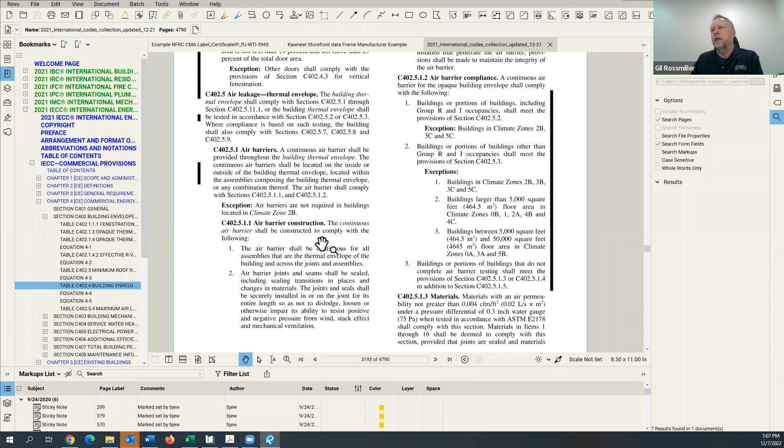Okay. And the only thing that's really different is you've got the ability now to, I'm going to go ahead and share my screen real quick, is the ability to have, rather than dealing with the volume of the very small apartment buildings, which is generally where this will end up showing up, right? I went into the commercial piece here, but the same thing would be for most of the time where we get the confusion is

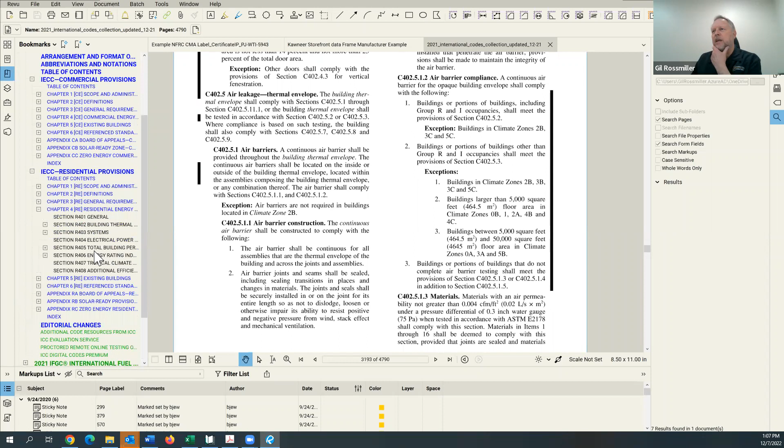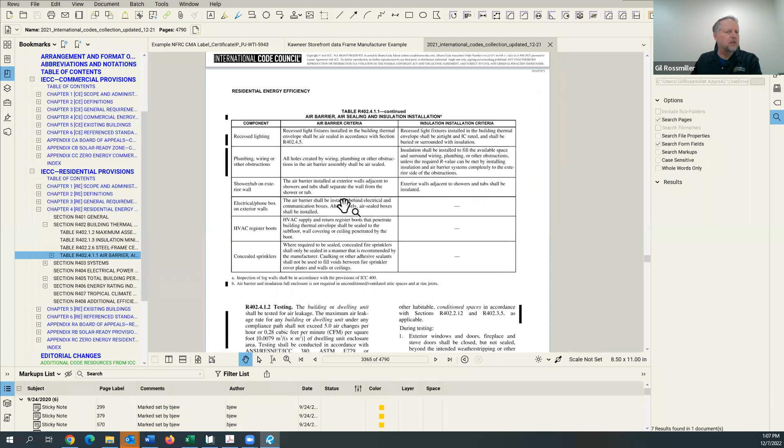R-2s that are 3 stories or less in height, and that essentially is going to be that way forever, meaning that R-2s, 3 stories and less, will always be out of the residential portion of the energy piece. The Board of Directors has made that call.

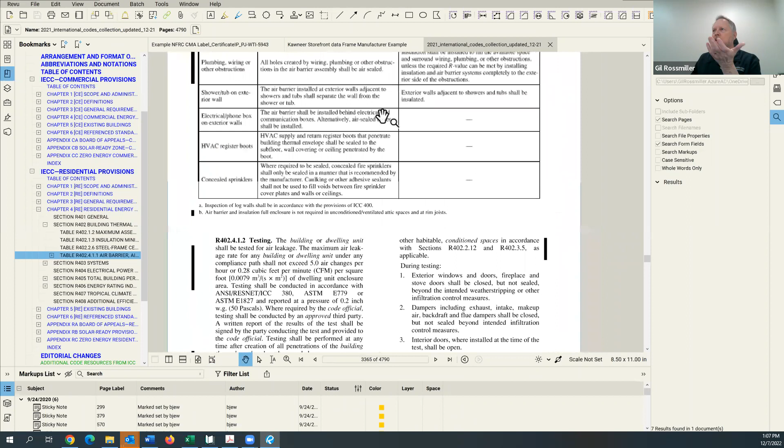So here's all the sections that talk about the testing that's required, the table. I mean, it changed a little bit here and there, but essentially says the same thing, right? Got to have air barriers pretty much everywhere so that the insulation works properly.

But here we get into the testing, and we get into this nice little piece about heated garages. In 21, it was really nice because we made that distinction. It's just like, guys, we really want to separate the garage from the house. Okay, so if it happens to be a heated garage, we're not including it in the air barrier test. It's not included in the blower door test. We're just doing a visual inspection, and that's what this exception talks about here.

But here is where we get into the testing. This little exception down here talks about, rather than the volume, it talks about our, what the heck did they call it? The CFM per square foot. Well, per square foot, but it's the dwelling unit enclosure. Yeah, enclosure area. Thank you.

Yeah, and so the big difference there, okay, is that we're not doing the building now. We're doing the enclosure area for the dwelling unit, and so that means the walls that are connected to each of the other units. It's not just the thermal envelope anymore. That is a big change. Mm-hmm. And so you're testing the unit and not the building. Two entirely different subjects, right?

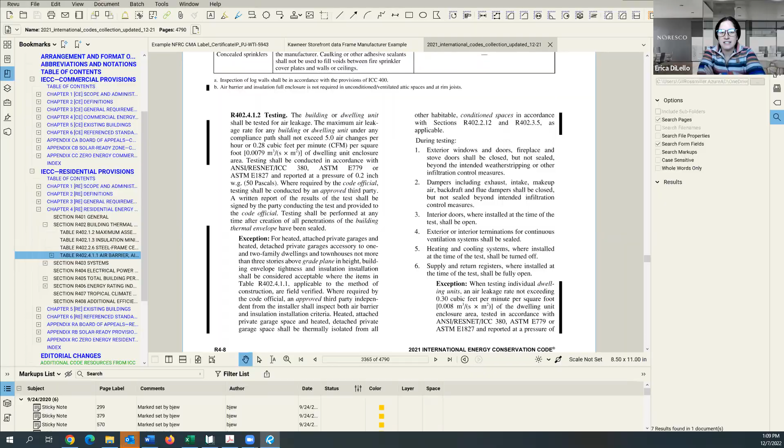It looks like we got one question for you guys so far. So Dan kicked it off for us. The question is, if cooling is done through multiple 5-ton split system units, and all units add up to over 65 kBTU, do they need an economizer? If it's not an RTU, how do you have an economizer?

Yeah. So what you're saying is that we've got a commercial type occupancy, Dan, and we're talking about individual units. Yeah, that's fascinating. If you don't have an RTU, you're still going to be able to do it. It just depends on how it is they're bringing in their outside air, right? So the entire, individual room units in the room of a restaurant. Fascinating. Wow. Yeah, that's interesting, isn't it? So they must be using residential style stuff, huh? Oh. They're not using an RTU.

So the whole idea behind the economizers is that we're bringing in the outside air when we don't have to actually have the air conditioning. So if we're conditioning the inside to 75 degrees and it's 70 degrees outside, we don't need to run the air conditioner. That's a fascinating thing. I think, actually, they've put a 5-ton unit in front of the roll-up doors. Oh.

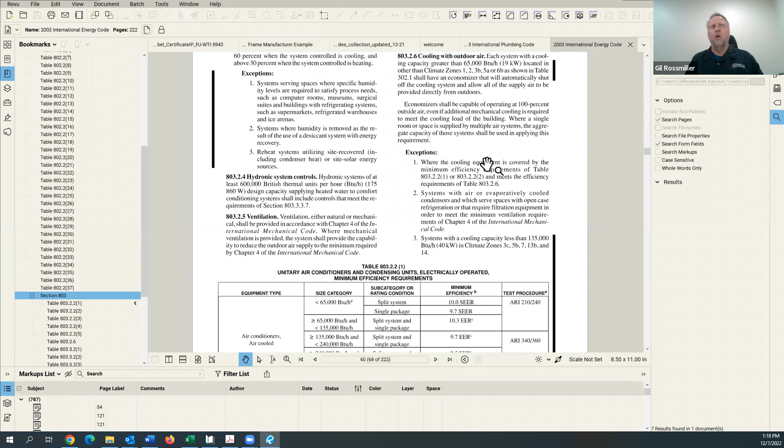Okay, so this is 2003. And here's the section Dan was talking about, and it does talk about it. Now it's a cooling capacity greater than 65,000. Of course, they said they had a 5-ton unit. And it says the same, 100% outside air. We can just ignore these because the climate zones in this code are way different than the other code. I think it's climate zone 12 or something like that for Colorado. We'd have to double check again.

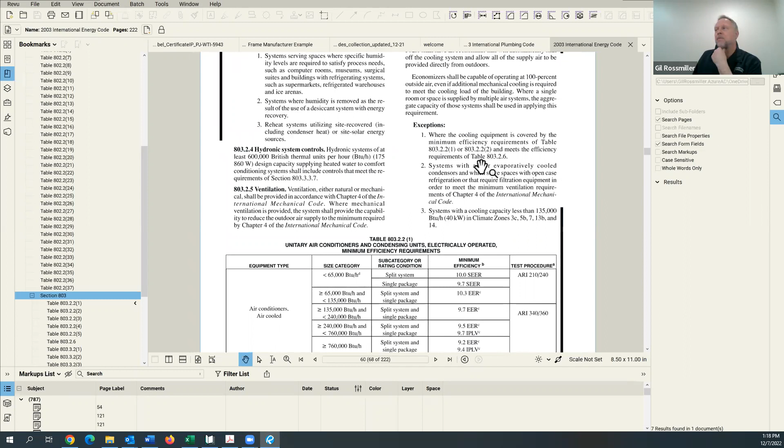Did you check the efficiencies? The efficiencies here are so low relative to what you get today. They might meet the efficiency and not have to deal with it. And it's not evaporative cooling. It's not a swamp cooler. And we'd have to look. Dan, what did you see? What climate zone was Colorado in? Because I forget. I want to say it was 12. He's saying 13B.

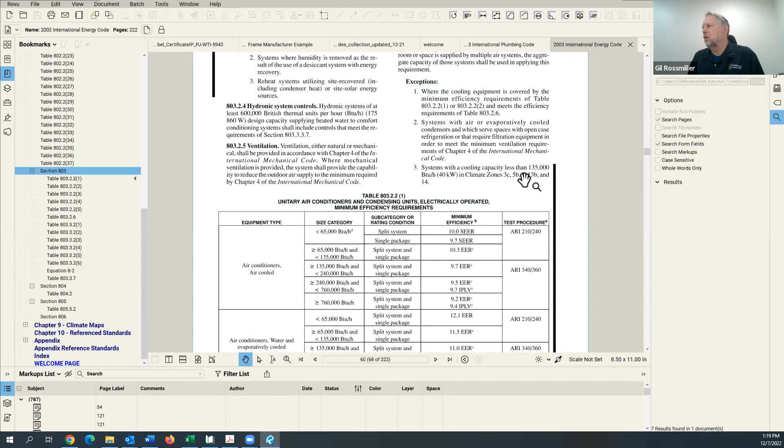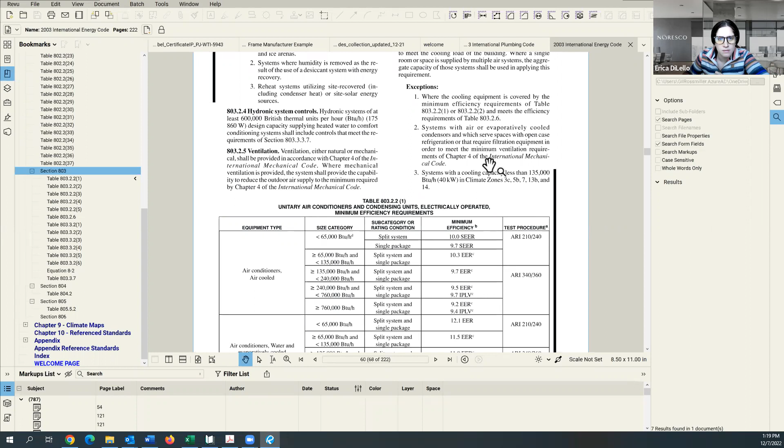Oh well, if it's 13B, that would be exception number 3 there, if everything's less than 135,000 BTU. But it doesn't sound like it is at 60,000. I mean, the 2 units put it at 120. I think he said the total adds up to over 65,000 BTUs. So all 5 systems add up to 65,000.

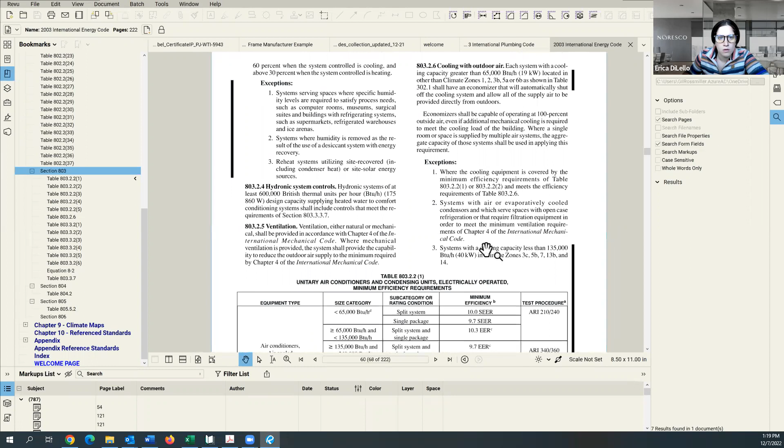Yeah, they didn't clarify it very well. You still get into that debate today. Is it each system or is it the whole building system, right? Fascinating. No, that's what it says. So if they've got that stuff, they have to do it. And it just seems odd.

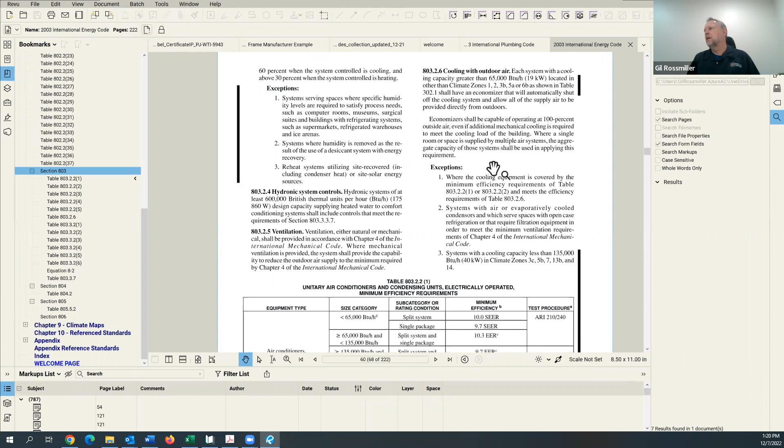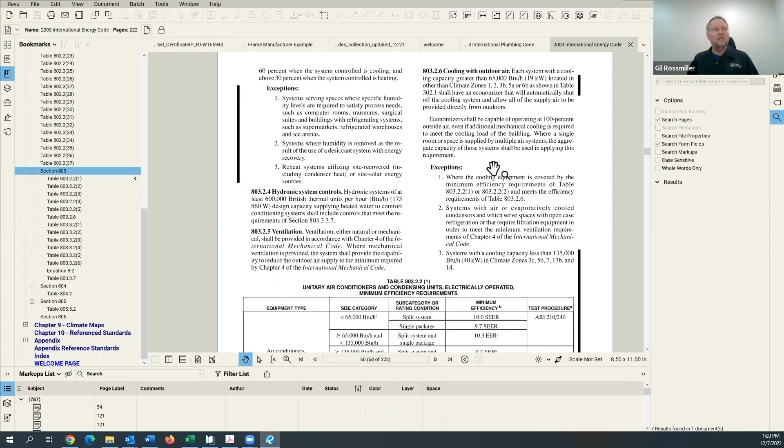Yeah, you're right. 5 units make 1 system. I would agree with that. So yeah, looks like they got to do it. And if they're not bringing in outside air, that's going to be tough. You know, if they're using like mini splits, right? They ain't got that. They don't have that. Not that I'm aware of. Okay, I'll stop.

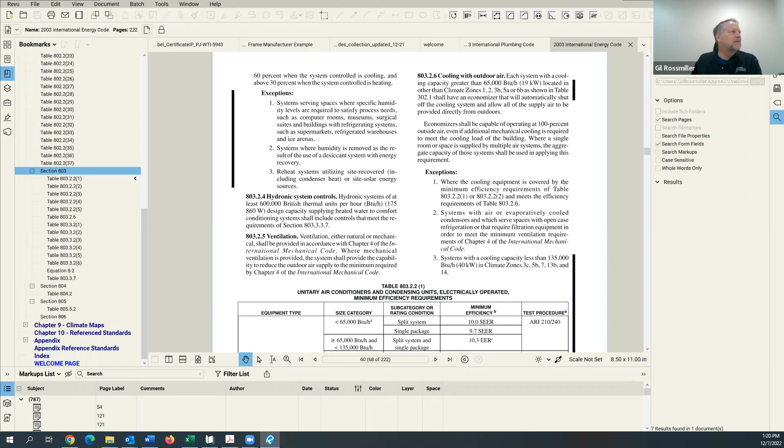You guys are very, very quiet today. Right. Yeah. You know, they're too busy eating lunch. You know, we don't care if you talk with your mouth full. That's right. All right, let's see.

Okay, so this was one of the discussion items that you said happened at the training about NFRC certificates not showing the information or not available in inspections or applicable for plan review. So, Gil seems quite urgent. Yes. I guess you could call it one of his, not pet peeves, because that's probably the wrong word, but yeah, so what we're looking at, so there's a couple of different ways, okay?

So the way the whole system works, this whole piece for commercial windows, is that we're dealing with the entire assembly, right? We've had that conversation. And the reason that we get residential style windows all the time is that they make the same window a million different times, right? So they get the window tested, they get the label, and then they've been given the authority through NFRC, the listing and their registration, that they can just slap the stickers right on the window, okay? Because they're just making them over and over again.

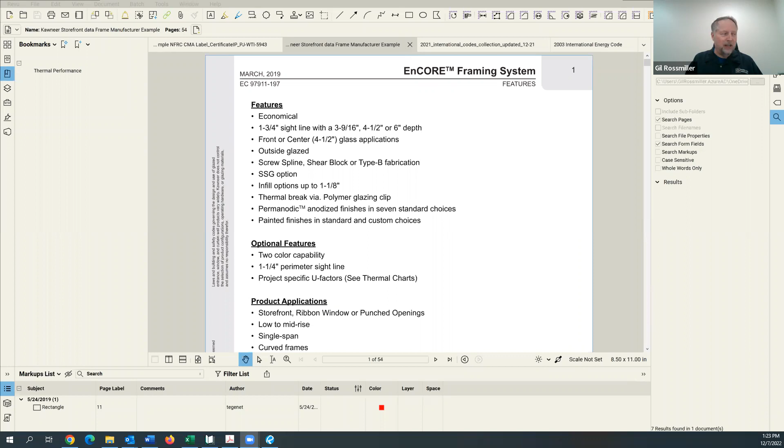And what NFRC has is a piece of software for engineers that are licensed with NFRC to run the software, and they run a simulation to say, hey, this is what this bad boy will do once it's all put together, okay? And it's for each job. It's for each project. Even if one project's using the same glass as the other, or the same frame and the same this and that, okay?

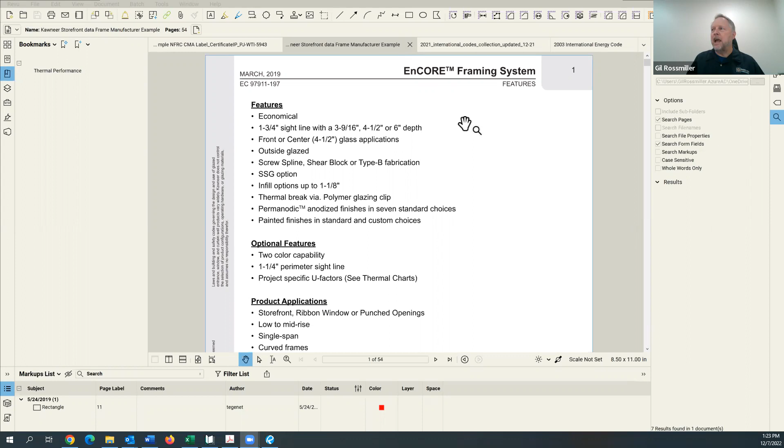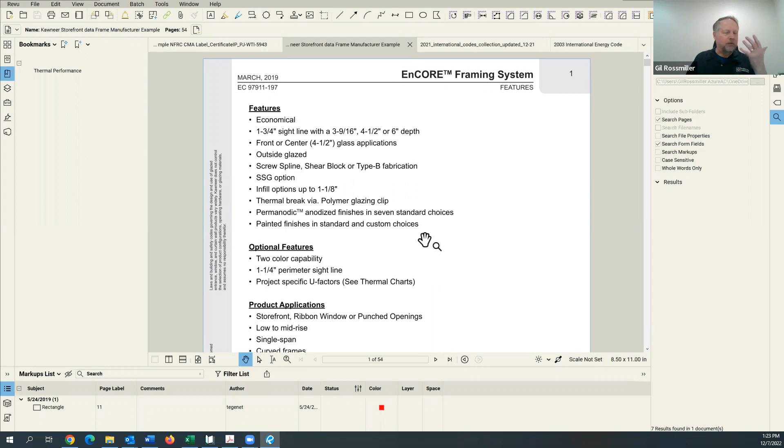And so on the screen right now is something that you can get typically from the frame manufacturer. This is Kawneer, one of the Kawneer systems. And it's many pages, it's like 54 pages long, okay? All the different specs and all the different ways. But what they have in here is this little thermal performance table. And I personally have allowed this for plan check, okay? Yeah, me too. And these are usually very close to what you end up with because they're pretty good. I've not found a lot of discrepancy between it.

So the way these tables work is that 9 times out of 10, what you'll see in your COMcheck is what we call the COG, or the center of glass U factor, okay? So if you get a COMcheck that says, hey, my commercial windows, their U factor is a 0.29 or a 0.26, you can almost be guaranteed that that's the center of glass value, not the value that you're gonna get, okay? So what you would do is, if you know the center of glass, which generally they do, right? Because the glass guys, so what's your glass? 0.29. Well, it's true for glass, just not the assembly.

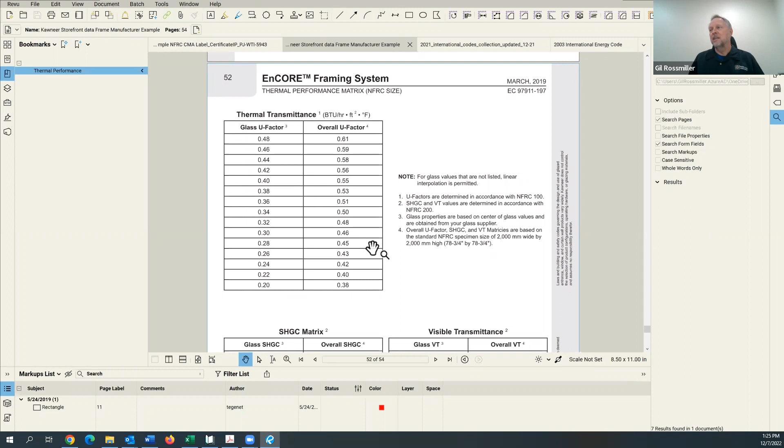So if we come down here to, I don't know, looks like we're at a 0.29. So the value overall with the frame and everything else is going to be somewhere between a 0.45 and a 0.46. Huge difference, huh? Big difference. They got the same thing for solar heat gain coefficients based on their frame, okay? And this is the biggie. So not only is this a biggie, but this is a huge one.

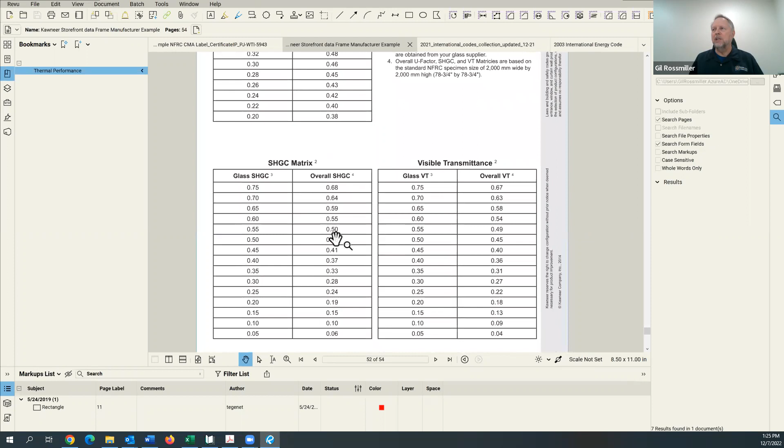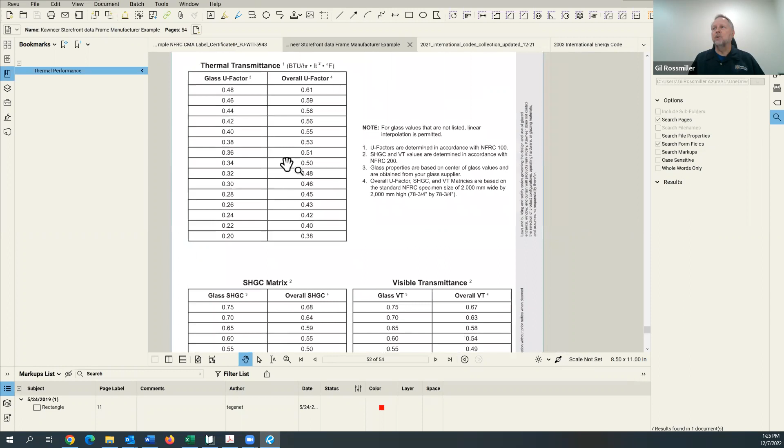The solar heat gain coefficient is what the mechanical engineers are using to decide what the solar gains are, right? And then what the heat loss is going to be for the U factor, okay? I mean, we're doing skyscrapers that are all glass. Imagine the difference it makes. It's like, oh, it's 0.29. Well, no, it's not. It's actually, right, more like a 0.45. Oops, okay? This isn't bad.

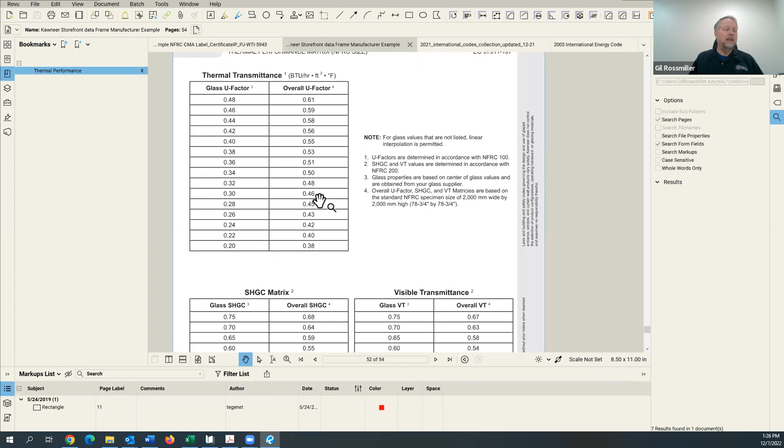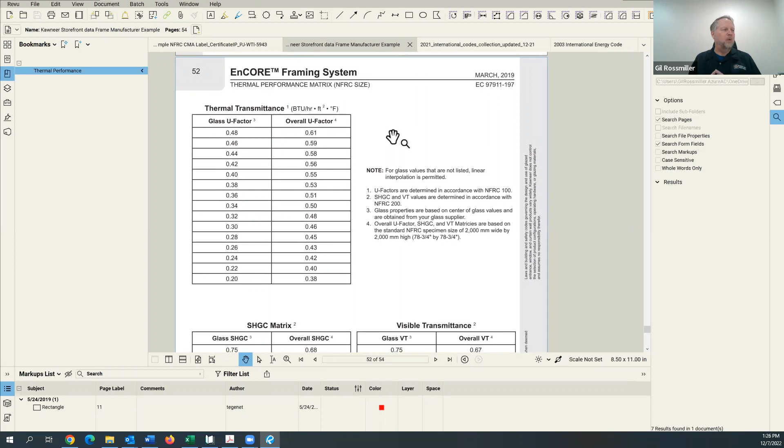A lot. I just had one from a jurisdiction where they said, oh no, we've got it, no big deal. And we said, okay. Put a big red mark on the front, said, hey, you're gonna have to have this NFRC certificate before you can move into your building. Oh, they got it. And their COMcheck, guess what their COMcheck showed? A 0.29.

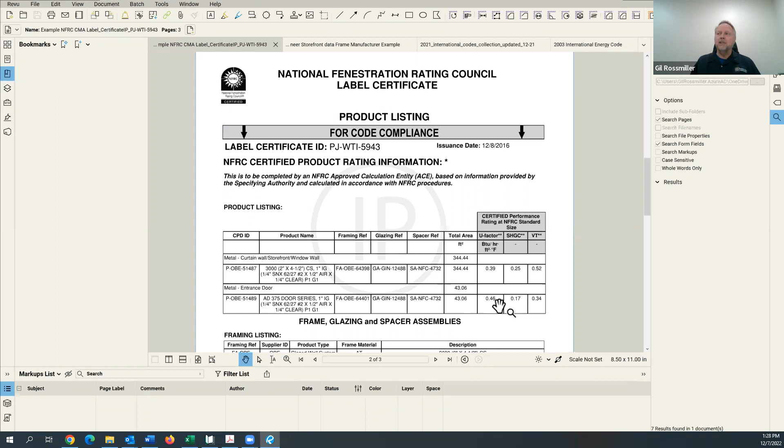So it's amazing. This has been around forever. When did we not see that the windows had to have an NFRC certificate in the code, right?

I don't know. Let's ask Dan. He's having fun in the 2003. Right. Let's ask Dan. Hey, Dan. Never mind.

So anyway, that's the long and the short of it. But it's a process. The fewer windows, the more expensive, depending on how many different types you've got. You could spend a couple of grand probably doing this to get it through. So for bigger projects, $30 million projects, this isn't a big deal.

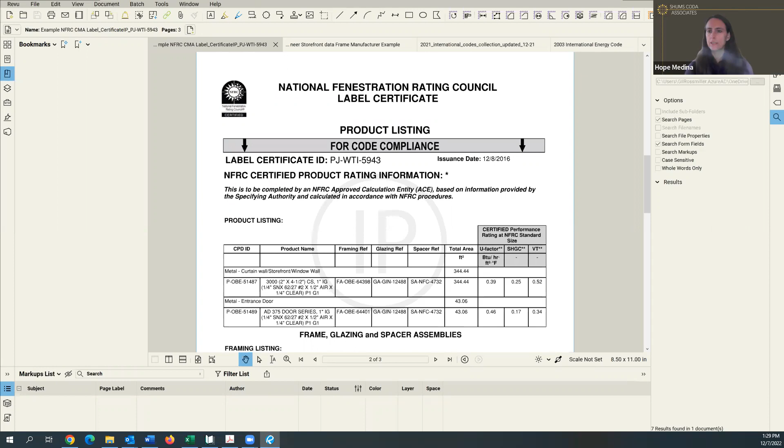Yeah, the one thing I would say, just adding to that, is a lot of times people think about, well, what are the actual consequences? Are you going to make them change windows for the whole project? Depending on the size of the building, there's that new law that has recently come into effect, the benchmarking, where you're documenting the energy usage, and windows can play a huge part in the energy use of a building.

So there may not be immediate, tangible consequences from installing something incorrect from the design, but there will be down the road as the mechanical equipment is not functioning properly, so their energy use goes up. So that's my 2 cents.

I knew Gil would have lots of fun. You have fun on that one. I'm still not seeing any questions from the audience.

All right. Can I ask a question of the audience? Yes. So just tagging on to what we just discussed. How many of you are actually getting the framing manufacturer information for the glazing and getting the NFRC certificates out in the field? Or is it something that has been a battle? Just raise your hand.